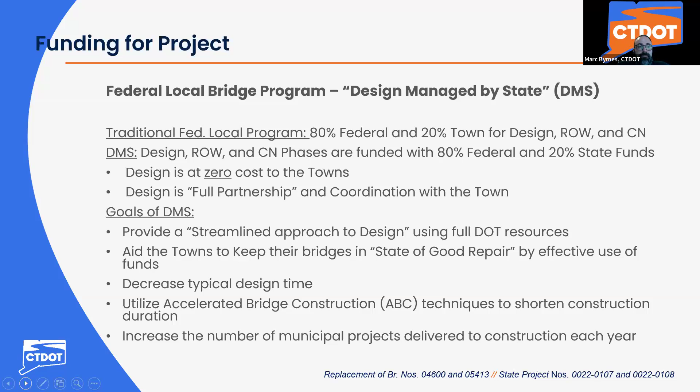I'll now turn it over to the town first selectman, Christopher Lipke, for some opening remarks.

Thank you, Marc, and I'd like to thank you and your team from Connecticut DOT. About two years ago, when you first approached the town on this project, I was enthused with the thought of getting two bridges replaced at no cost to the town. Both these bridges have year over year been reported as being more and more deficient. To get these replaced and to get two new bridges in place that'll serve our town, at no cost, is a great project, a great opportunity for us to take care of work that we really would have a tough time taking on ourselves. So I'm looking forward to hearing the rest of your presentation and working with you in the near future.

Great. Thank you very much, Chris.

I'll now introduce the rest of our project team. Our division chief of bridges is Martin Sweeney. Principal engineer of the consultant design unit is Derek Broussard. As I said, I'm Marc Byrnes, project manager. Jeff Organic is the project engineer. From the Office of Rights of Way is Zachary Garino. And representing Close Jensen and Miller, or CJM, the department's consultant liaison engineer, is Jim Playtosh, project manager, and Andy Shepard, project engineer.

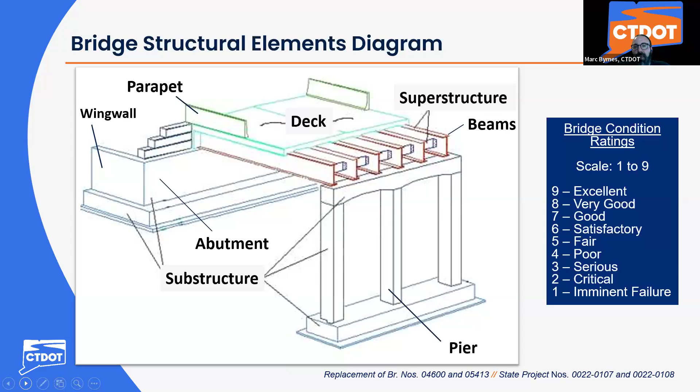Bridges are inspected on a biennial basis and are given a condition rating on a scale of 1 to 9 based on the key elements, with 9 being excellent condition and 1 being imminent failure. But at any point, if the Office of Bridge Safety feels there is a need for corrective action, they will inform the town as soon as possible.

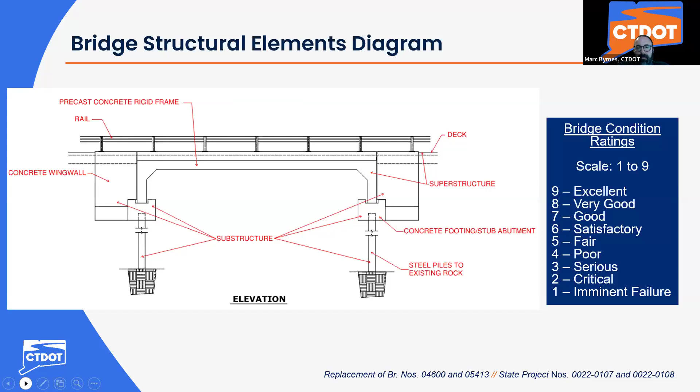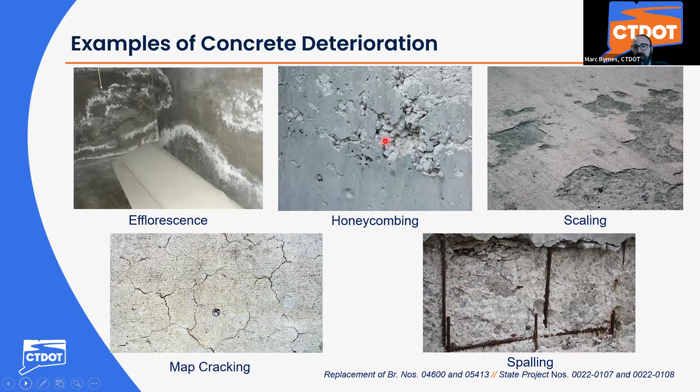I'm going to turn over to Andy Shepard for the formal presentation. Andy?

Thank you, Marc. Hi, everyone. My name is Andy Shepard, and I'm project engineer for Close Jensen and Miller. We'll go over project 4600 first, and then we'll move on to the other bridge and follow up with some questions.

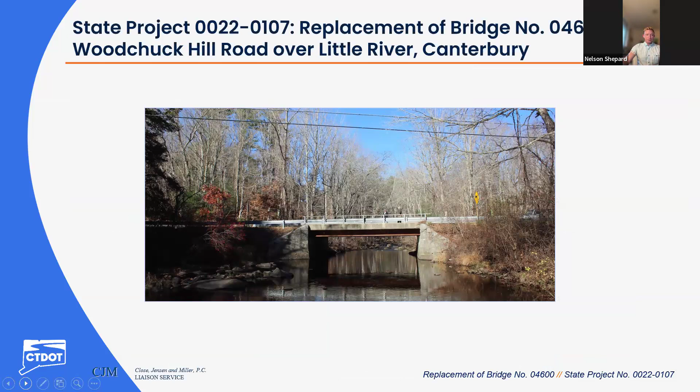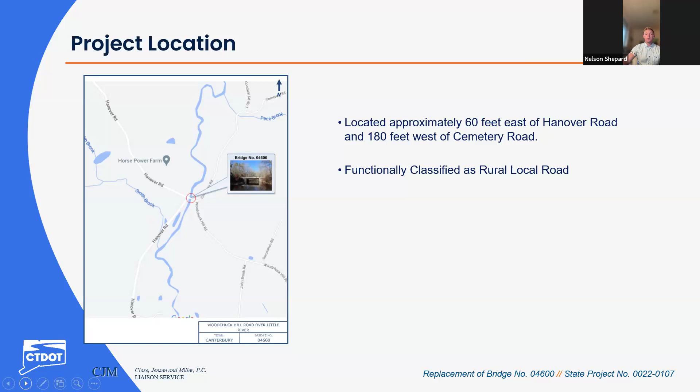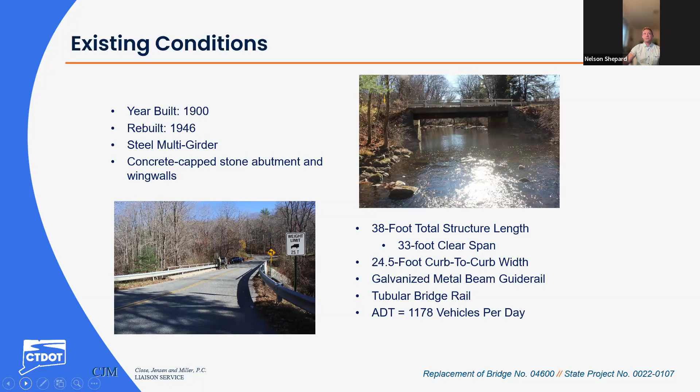We do have some utilities here as well. There's overhead electric communication and cable television that span the structure on the south side.

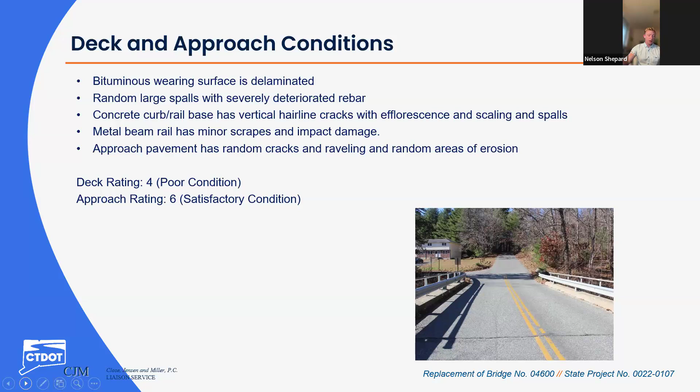The deck here is in poor condition with a rating of 4, and the approach is satisfactory with a rating of 6. We have some damage to the wearing surface with areas of cracking, and the beam rail also has some damage to it.

The superstructure is in poor condition with a rating of 4. The bearings here are all rusted and have gaps in them, and the girders are also heavily rusted, some with pretty severe section loss to them.

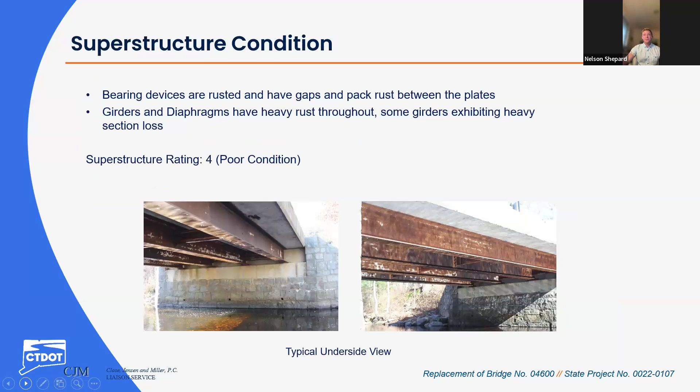The substructure here is in good condition with a rating of 7. The abutments you can see are masonry abutments with concrete seats, but there is evidence of deck leakage and also some minor cracking. There's also some random spalling and cracking on the abutment seats as well, and in between the mortar joints.

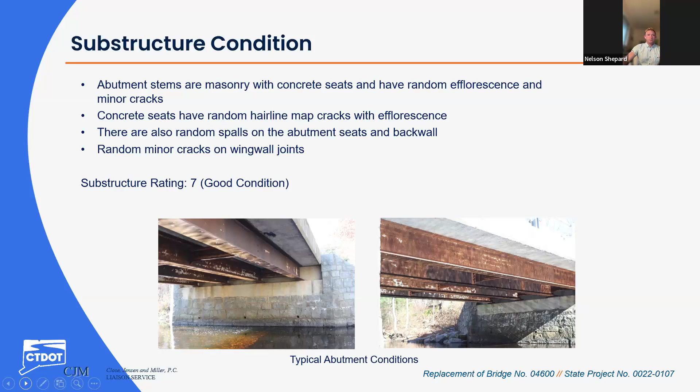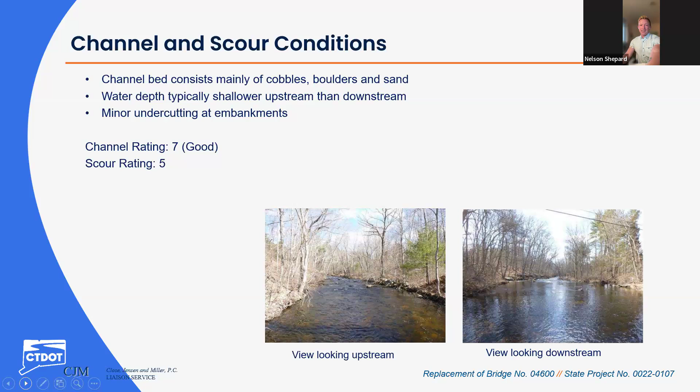Channel has a rating of 7, and scour is noted as 5. The channel bed consists mainly of sand and various sized stones. The water depth is typically shallower upstream than downstream, with minor undercutting at the embankments and some pretty heavy vegetation growth.

For this bridge, we are proposing a full replacement with a prestressed concrete box beam superstructure on micropile supported integral abutments. This would consist of a single 54-foot clear span on reinforced concrete abutments on piles. There'd be a 29.5-foot out-to-out width and a 26-foot curb-to-curb width, consisting of 11-foot travel lanes and 2-foot shoulders. We'll have open metal bridge rail on the bridge, membrane waterproofing, and bituminous concrete overlay. We'll have new approach slabs and new guide rail up to standards, and there will be some temporary relocation of all utilities for the duration of construction.

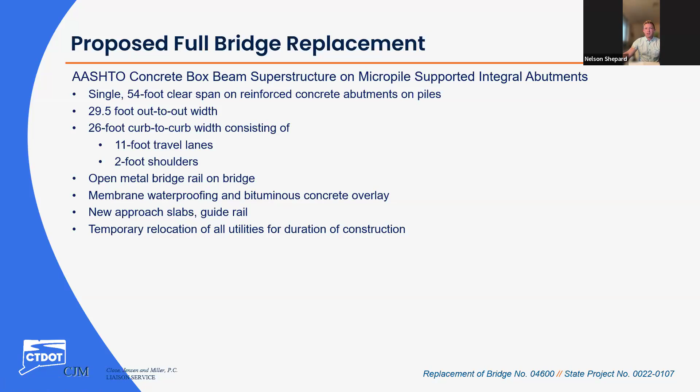For some perspective, this is an elevation view of the proposed project, showing the bridge as if you're in the water looking right at the structure. The new bridge railing is shown here in yellow. The box beams are shown in orange. The wing walls are in pink. The new abutments and deck are in gray, and the micropiles you can see in brown.

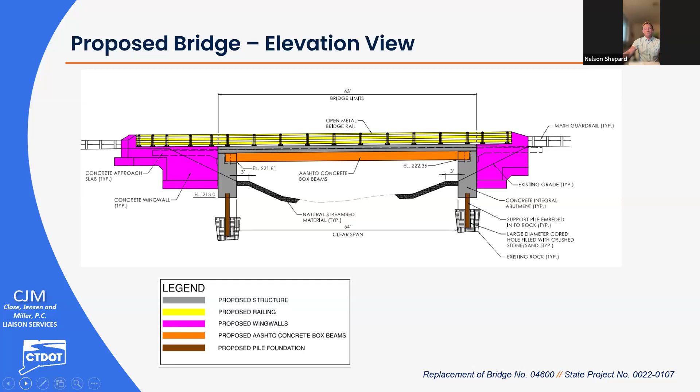Again, a different view. The cross section shows as if we slice through the structure while standing on top of it. The bridge railing, again, is shown in yellow. The wearing surface is in black. The deck is in gray, and you can see the box beams in orange again.

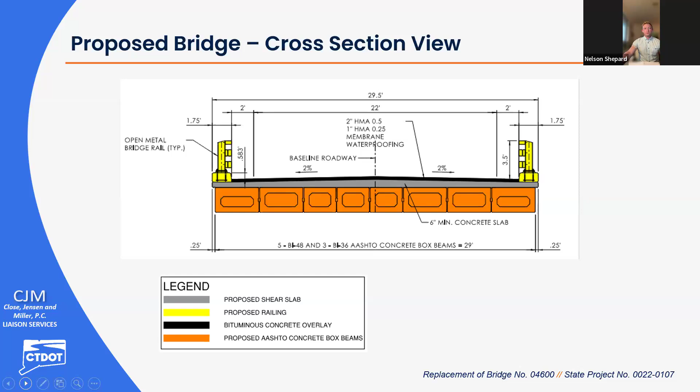We have the plan view, showing the entirety of the affected area for this project. The existing pavement is shown in gray, and that won't be touched. The roadway being reconstructed is shown in yellow. The wing walls here are in pink, and the proposed structure here is in orange.

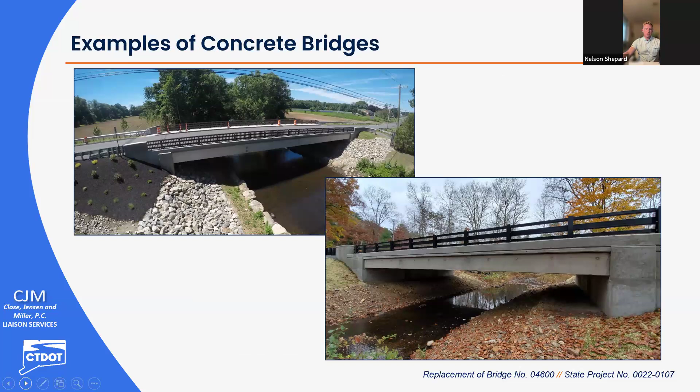We have the roadway profile here, so the profile and the alignment really won't be changing much at all. These are just some examples of what the bridge could look like, just to give you a viewpoint of what we're looking at.

We are proposing a detour here of about 4 miles, and it would include Hanover Road, Woodchuck Hill Road, and John Brook Road.

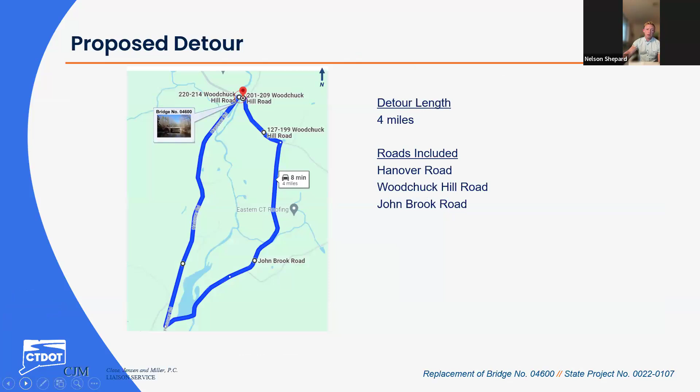Anticipated permits here, we're anticipating a local inland wetland permit, Army Corps of Engineers permit, and a flood management commission permit.

Schedule and cost, we're looking at beginning construction in spring of 2026 with one construction season, so about 6 to 8 months. The estimated cost here is about $2,095,000.

All right, so now we'll move on to the next bridge, Bridge 5413, which is Tracy Road over Kitt Brook.

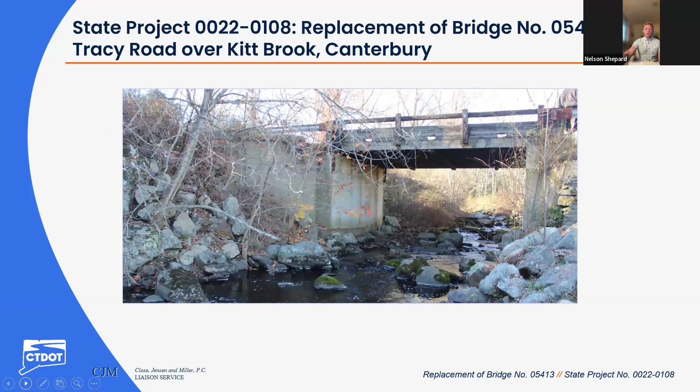Project location here, we're located about half a mile south of the intersection with Westminster Road, or Route 14. It's functionally classified as a rural local road.

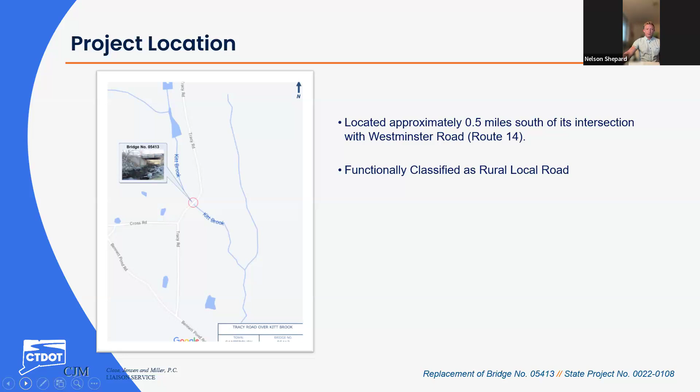Again, aerial view, we have just some pretty residential properties here. The existing structure was built in 1928 and then rebuilt in 1986.

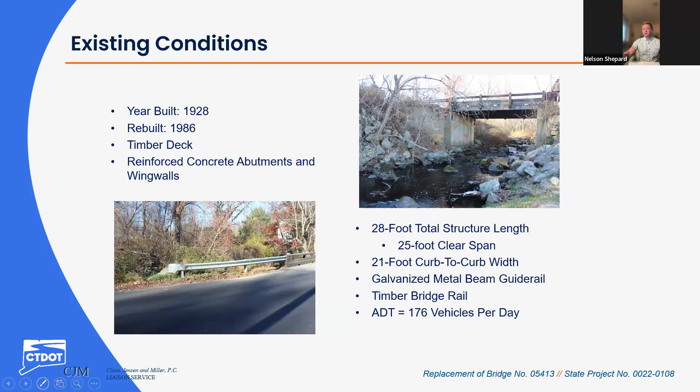It's a timber deck on reinforced concrete abutments and wing walls. The structure has a 28-foot total structure length with a 25-foot clear span and a 21-foot curb-to-curb width. There's galvanized metal beam guide rail here as well, and a timber bridge rail. Average daily traffic here is only about 176 vehicles per day.

We have some utilities here as well. Again, overhead electric, communication, and cable television are on the east side here.

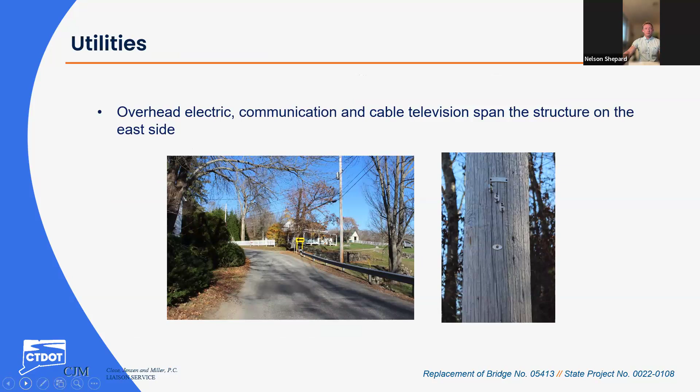The deck here is in satisfactory condition with a rating of 6, as is the approach. The wearing surface has some cracking as well as some active leakage. There's heavy sand buildup along the shoulder. The timber rail is also damaged, and there are areas of erosion at the approaches filled with various debris and everything.

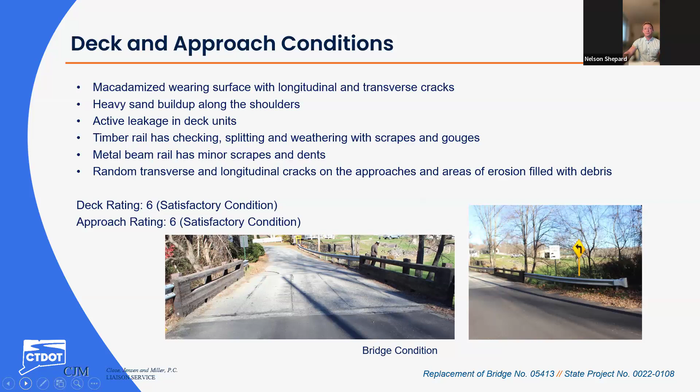The superstructure is in satisfactory condition with a rating of 6. The deck units all have some longitudinal cracking. There's minor splitting at random locations, and some soft, punky wood at the edges of the units. There's also some active leakage and staining between all of the units, and the joints between the units are open, which is causing that leakage.

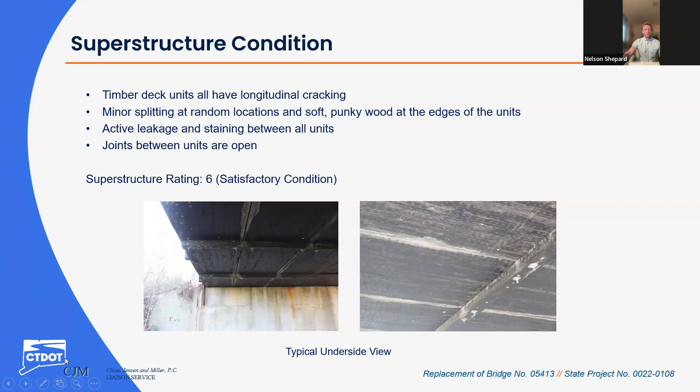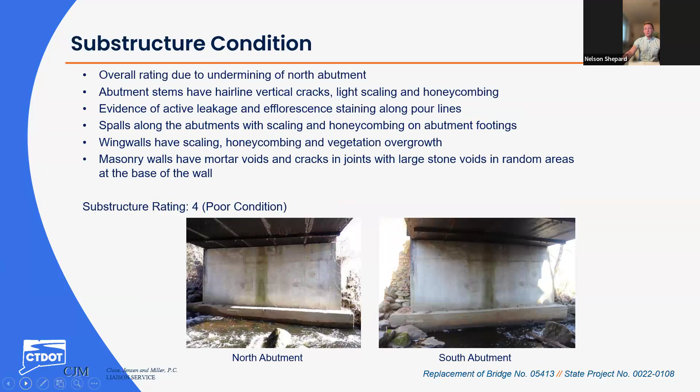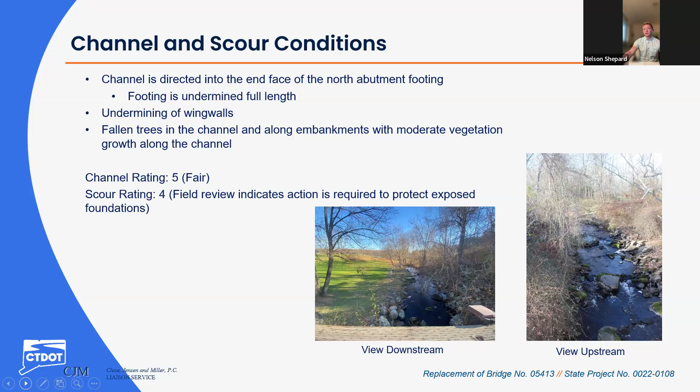We are looking at a full bridge replacement here as well, with a cast concrete slab superstructure on abutments on rock. This would consist of a 35-foot clear span on reinforced concrete abutments on rock, with a 27.5-foot out-to-out width and a 24-foot curb-to-curb width, consisting of 10-foot travel lanes and 2-foot shoulders.

We'll have open metal bridge rail on the bridge, membrane waterproofing and bituminous overlay, new approach slabs, roadway runoff, and guide rail all up to standards. We'll temporarily relocate all the utilities during construction.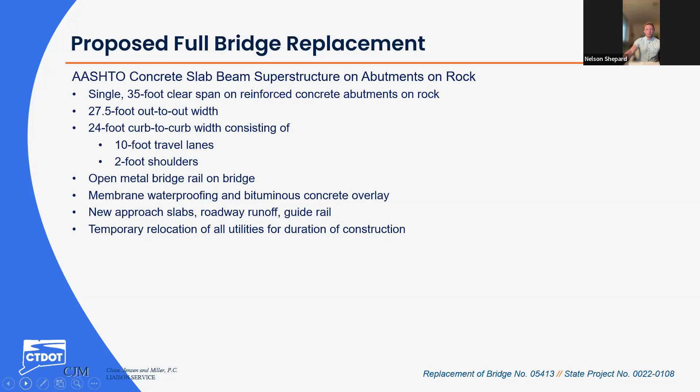Looking again at the elevation view, you can see the proposed structure in gray, the railing in yellow, wing walls in pink, the new structure, and the beams in orange.

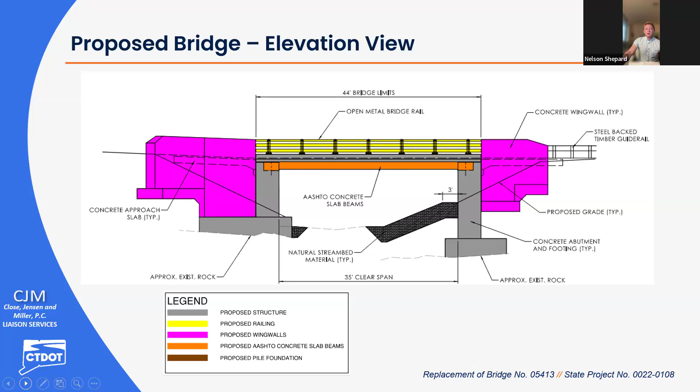The cross section here, again, you can see the slabs in orange. We have the railing in yellow, the deck in black, and the slab in gray.

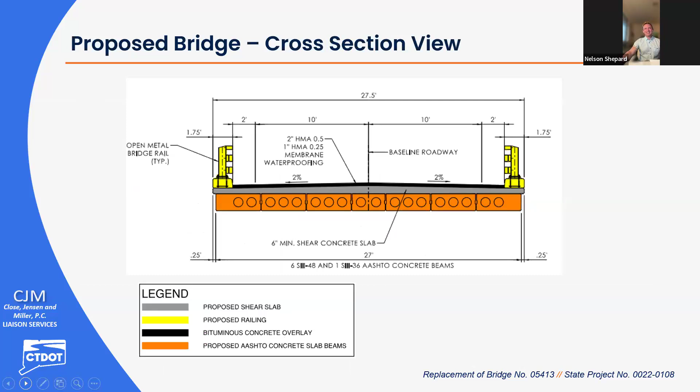And last, again, the plan view. This shows what is being affected in the area. The existing pavement you can see in gray, and what's being reconstructed is in yellow. The wing walls are in pink, and the proposed structure area is in orange.

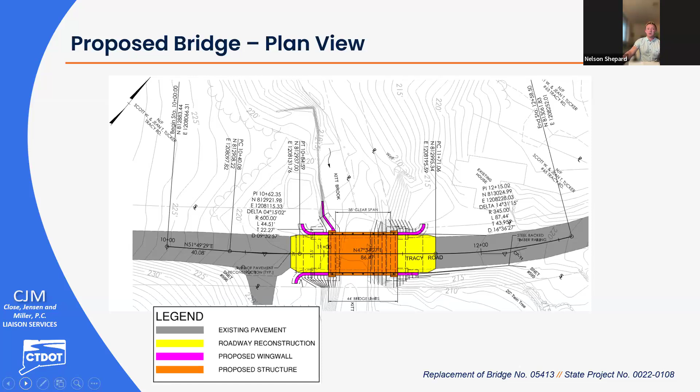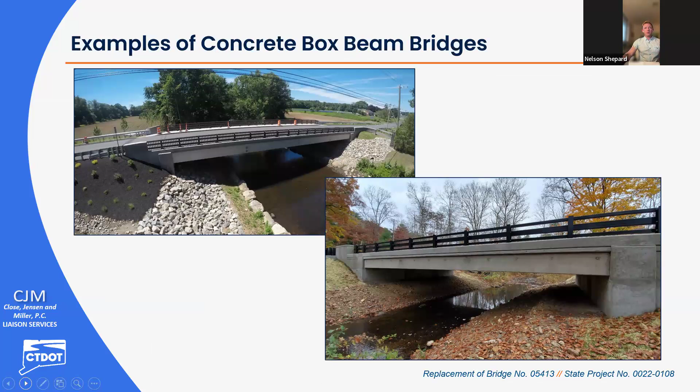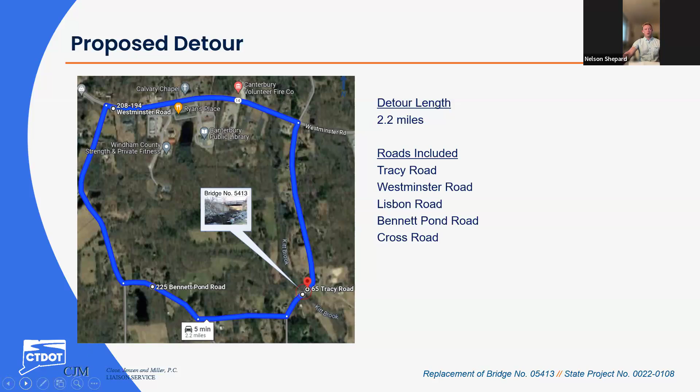Then the detour. We're looking at a 2.2 mile detour here, which would include Tracy Road, Westminster Road, Lisbon Road, Bennett Pond Road, and Cross Road. Anticipated permits here would be the local inland wetland permit and the Army Corps of Engineers permit.

Schedule and cost: we're looking at spring 2026 with a 6 to 8 month duration. The cost here would be $1,550,000. All right, that's it for me.

Mark, you want to cover the right of way? Sure, thanks Andy. So Zach unfortunately cannot be here tonight, so I'm going to give a brief overview of the rights of way. The Division of Rights of Way is responsible for acquiring all property rights necessary for the project. They're bound by statutory references, Connecticut General Statute Section 13A-73 and 13A-98E, and the Federal Uniform Relocation Assistance and Real Property Acquisition Policies Act of 1970 as amended. There could be impacts to property, including partial acquisitions, easements, or rights, and these impacts are subject to change as design progresses. At some point, an agent will reach out to the impacted property owners to discuss the rights of way process in further detail. At this point, that's really all I can speak on. Thank you.

Hello, everybody. I have been monitoring the email, the phone number, and the messaging, and there are no questions at this time.

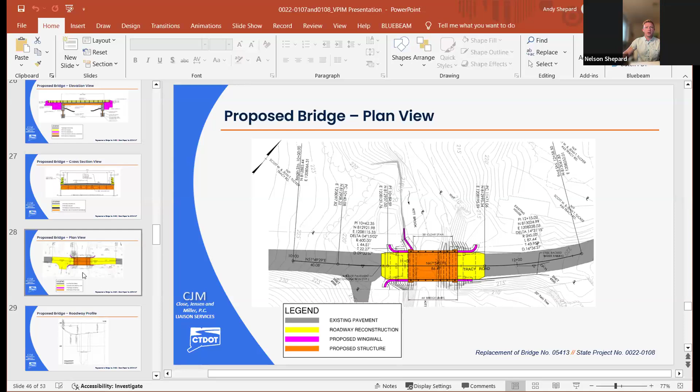No, we're not looking at any significant changes to either project. For the other project, we tried to avoid having to really do anything with this little access driveway to the south, southwest, and the rest of it is really not changing. So negligible impact then. Correct, yes.